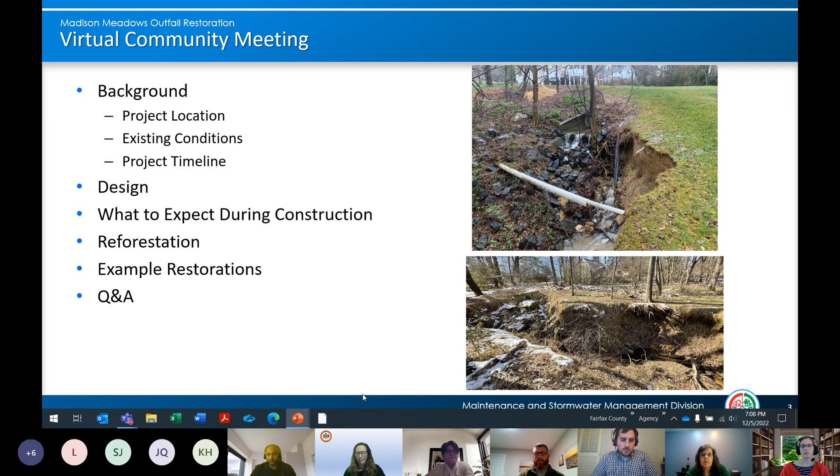The project starts at a gully just upstream of what we're calling Tributary 1, which is coming off of our storm drainage easement off of Madison Meadows Lane. The extents go down to Tributary 2, which is coming off of our proposed access and easement off of Timberlake Court. This channel continues downstream into a pond that has been sedimented in before it crosses underneath Timberline Drive.

The project boundaries on this location map again show that the extents go from upstream of Tributary 1, along the main channel downstream to Tributary 2. There are some bump-outs where we have staging and stockpile areas planned, and the entire project ties out upstream of the playground on the Park Authority property here.

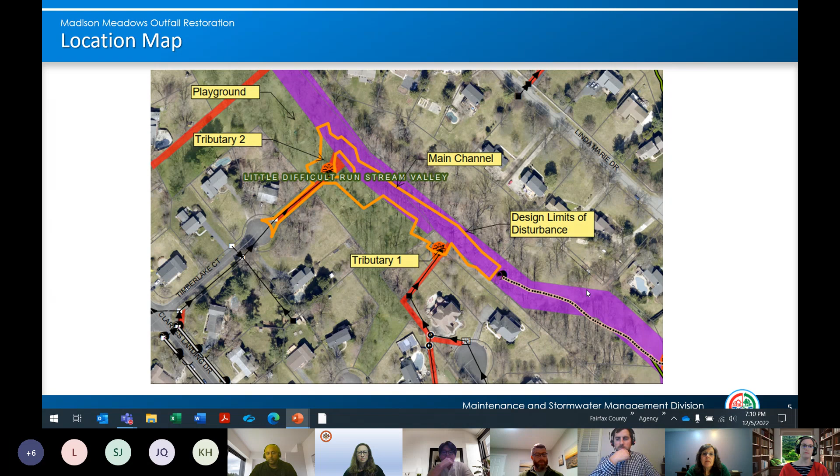Here are two photos. The one on the right represents Tributary 1. This is an eroded outfall. Fairfax County Maintenance and Stormwater Management Division got a service request in January 2021 to come and address this outfall.

You can see this private septic line that crosses in front of our channel that is now exposed. But if you look on the left, upstream, this is the head cut or the gully that has formed upstream of Tributary 1. I like to use the example of Niagara Falls—an important thing to keep in mind is that erosion kind of works its way backwards.

Similar to Niagara Falls, how you have the water running over the falls, eventually over time Niagara Falls has kind of moved backwards—the location of the actual falls has moved backwards along the course of the river. In this case, a gully, a knickpoint, or a head cut are all terms we might use to describe this upstream point of erosion. This will, over time, continue to move upstream within the channel.

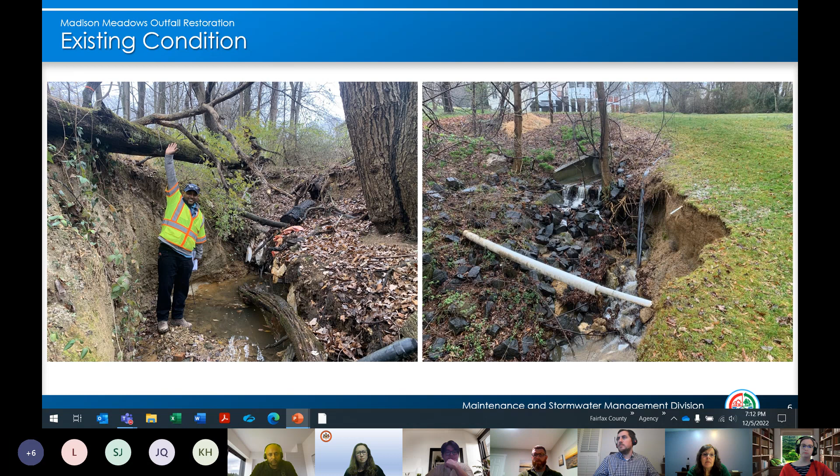Here's another photo. On the left, you can see our staff member again for scale, showing the height of the erosion at that crossing of the septic line. On the right, you can see the tributary coming in from the left and the main channel on the right. The channel on the right goes upstream, the channel on the left goes downstream. You can see where the channel has already deepened and widened, and we have a tree that has leaned and fallen into the stream channel.

We've gotten the question, why don't we just address the tributary without tying into the main channel? We can talk more about this with the design plan—it's not going to be as effective of a design to tie down because you have 5 feet, 6 feet of elevation difference without raising the entire main channel as well.

Before we move on to talk about the existing condition of the main channel, the septic line that's crossing - you can also notice there are 2 size pipes. In theory, the larger pipe is supposed to be a protective outer casing for the inner pipe, but the erosion has extended far beyond that, putting that private infrastructure at risk.

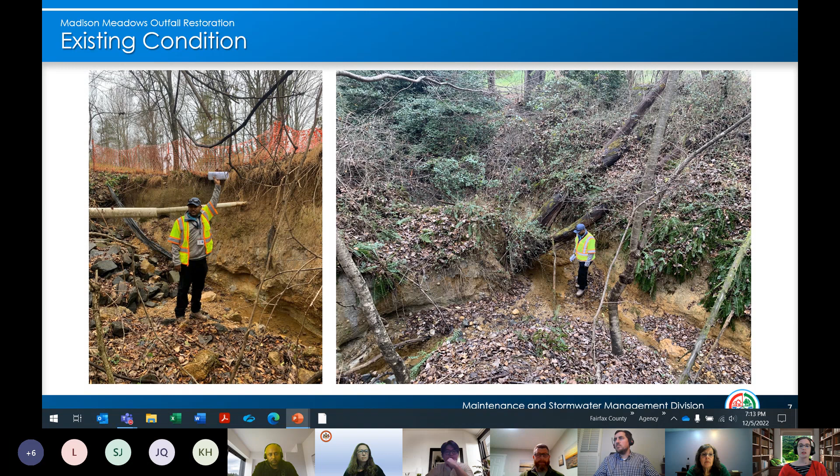Here's 2 photos taken from the main channel. The erosion in the main channel isn't necessarily visible from the top of the bank, or in the left picture where Jack is standing. But if you get down into the channel, you can see evidence that it has downcut and is starting to widen, eroding the soil underneath the bank.

And John, do you want to add some more about channel morphology? Yeah, the typical evolution of a stream is it erodes down until it hits a hard surface like bedrock or some big substrate. Once it hits that point, it starts over-widening. I think most of this channel has hit bedrock, and you can see on the picture on the left it's starting to widen, eroding the banks out on the sides and causing the trees on the banks to become undercut and eventually fall in. Is that what you were looking for, Rachel?

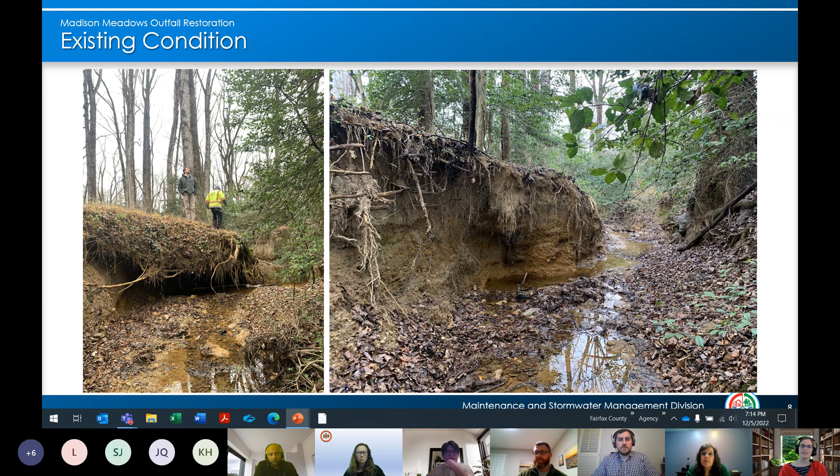Yes, thanks. So just downstream of that, here's another example where the erosion, that widening, is causing the soil underneath and through the root balls of these trees to erode up. There's another knickpoint going through these root systems. This is now on the Park Authority property, and it creates a tripping hazard and a safety hazard. These conditions are fairly typical of the channel throughout.

As we walk down a little farther - Jack, John and I were all there for scoping this project when we got the service request in - it opens up to a fairly wide area with no large diameter trees or understory trees that wouldn't be shown in the design plans. As we were walking down trying to scope this project and figure out the best course of action, this immediately looked like a great place for a staging and stockpile area with limited impacts. On the left is a photo of a separate staging and stockpile area closer to tributary 1.

As you walk down farther, just past a clump of trees from that staging stockpile area, this is where you have tributary 2, and you can see it's eroded almost as deep as Ashenafi is tall. The end section of this is our closed storm drainage system. It outfalls here, and that end structure has settled and is starting to fail. Keeping in mind that erosion moves backwards over time, if we did not restore this, that erosion would work backwards to worsen the condition of that end wall and the pipe system, making it more work and more cost to repair.

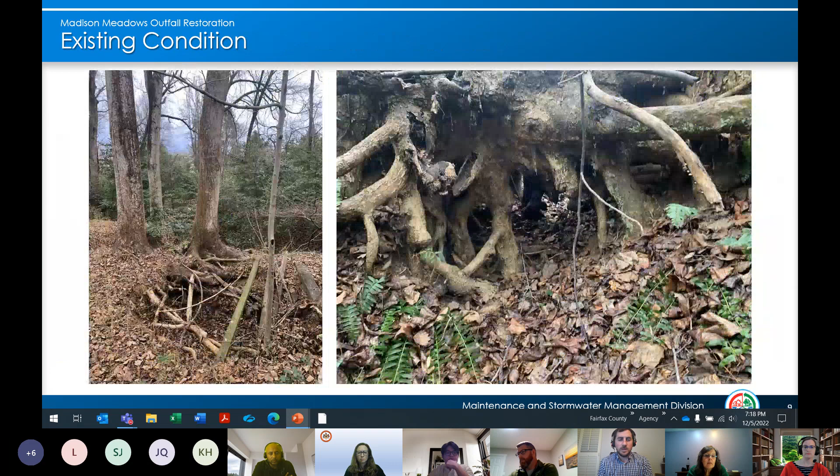One option being: do we just fix the tribs? It did not seem feasible to just fix the two tributaries, given that we wouldn't have anything to tie to with how deeply incised the main channel between the two tribs was. That's really what drove our scoping discussion during that meeting, and how we built the basis for the scope of work to complete the design.

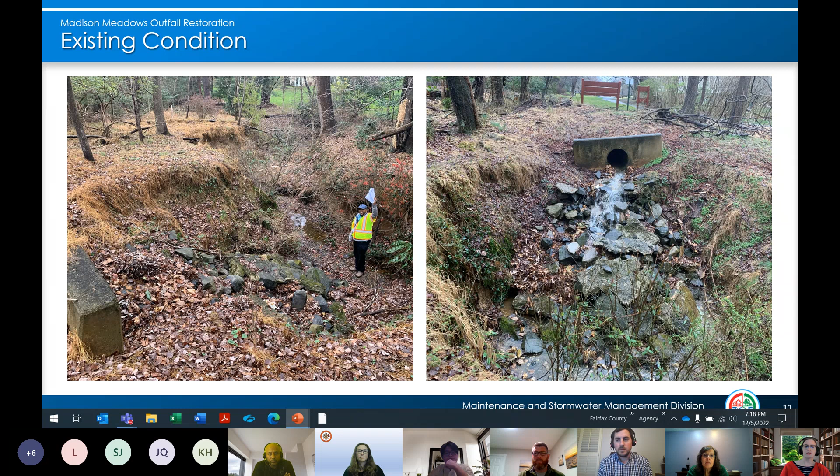So we've also got questions about our proposed access. Our planned access, again like Jack was saying, we walked the site and saw this open area for good access, with few impacts for staging and stockpile.

There's also an access and storm drainage easement through this entrance for the park property. We've talked with Park Authority about maintaining this path and keeping it open during construction. For safety, we'll put up a 6-foot fence to separate pedestrian traffic from construction traffic. Overall, it's grassy, so there would be no tree impacts.

The alternative where we came in off of Tributary 1 — we have a storm drainage easement here, but you can see it's developed. There'd be larger tree impacts and more impacts to private property, as well as the private septic system.

Right off the bat, even just with scoping, it was readily apparent that access off of Timberlake Court would be preferred, and we'd be down in that area repairing the end wall and Tributary 2 anyway, so it only made sense to have the same access through the entire project.

I would add that when we talk about access, we look for areas where we have existing easements and land rights, and what's going to be least invasive to private property.

In this case, we had Trib 2, which had failing infrastructure and significant erosion, located in a storm drainage easement on Park Authority property. From a feasibility standpoint, this was the most feasible option for access, and it got us to the stockpile area the least intrusive way possible, as well as putting us in the area where we're going to be making repairs to Trib 2.

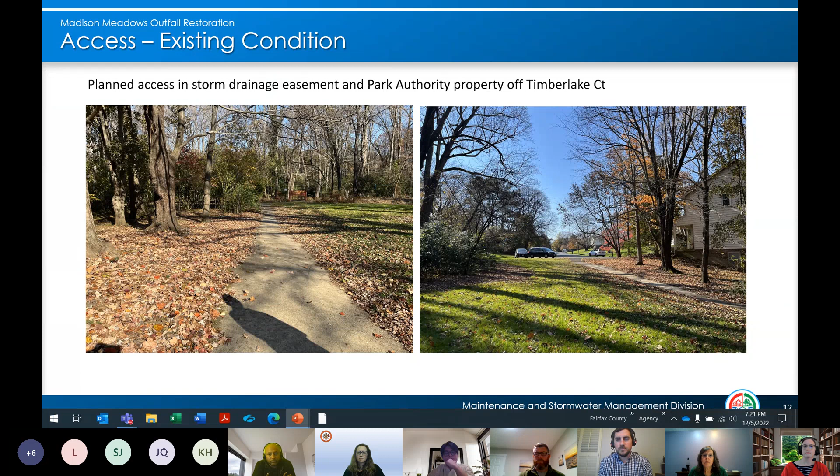So just a review of the timeline: the service request came in January 2021. That spring, Jack and I went out to scope it with Wetland Studies. We negotiated the scope and signed a task order for them to start design in late summer 2021. Throughout the fall and winter, survey was completed and the design commenced.

We went back and forth with floodplain modeling to make sure any impacts from construction — the extent of the floodplain, since we were raising and widening it — stayed within our county's floodplain easement. Once that checked out, the design was submitted to us.

We received it in the spring of 2022. As our workload allowed, we reviewed that design, and in September of this year, Ashinafi and I went out in early September to review the design in the field.

At that time, we made contact with two homeowners adjacent to the construction access and initiated conversations to get emails and start a community meeting. Through September, we also sent letters to homeowners whose properties were either affected, within the limits of disturbance, or immediately adjacent to construction. That included reaching out to the Clarkes Landing HOA.

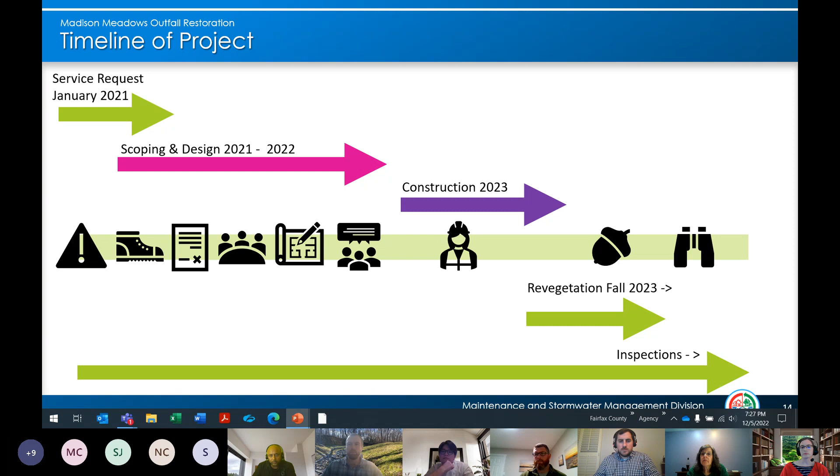So I'm going to hand it over to Irini and John to talk about the design. Here are some photos that represent what you might see on the design plans, on the engineering plans. The channel bottom is going to be reinforced bed material, a mix of gravel, boulders, cobble, and topsoil. And then there are other structures, which might include boulder pools and step pools, made out of imbricated or stackable boulders. We'll let Irini and John talk to that.

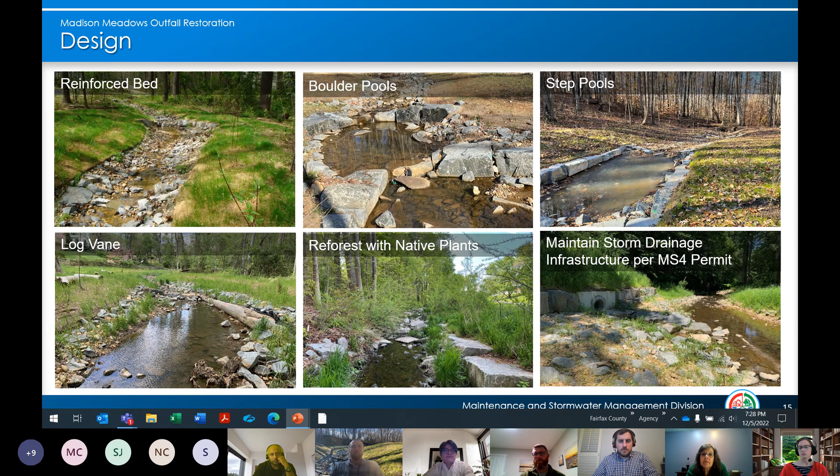We have several structures that incorporate logs, so a lot of the trees that may come down, we try to reincorporate into the designs, and reforest with native plants. We also have end walls that we're going to be replacing - one end wall. All right, so Irini.

Thank you, Rachel. Yes, this is the grading plan from the plan set. In the middle of this map, you can see the main channel, right now flowing left to right as it is oriented on the map. Tributaries 1 and 2 are flowing top to bottom, tributary 1 on the left, 2 on the right. The main channel length is about 650 feet, tributary 1 is about 50 feet, and tributary 2 is about 100 feet. As Rachel said earlier, we are starting the restoration of the main channel all the way to the left.

That is where the head cut you saw in the photo is, and that is where we're putting the structure - a step pool, like you saw in the previous slide, made out of imbricated rock. We are moving downstream and raising the channel; in some areas, raising it about 6 feet. This allows water to access the floodplain more frequently, so the velocities of the water will go down, and the erosive forces won't be as strong, so the banks can remain in place.

Hey Irini, I'm sorry to interrupt, but one of the residents is having trouble getting a frame of reference. Can you just point out a couple streets or a different landmark? Oh yes, of course. Thank you. Oh yeah, sorry about that, I didn't see the chat.

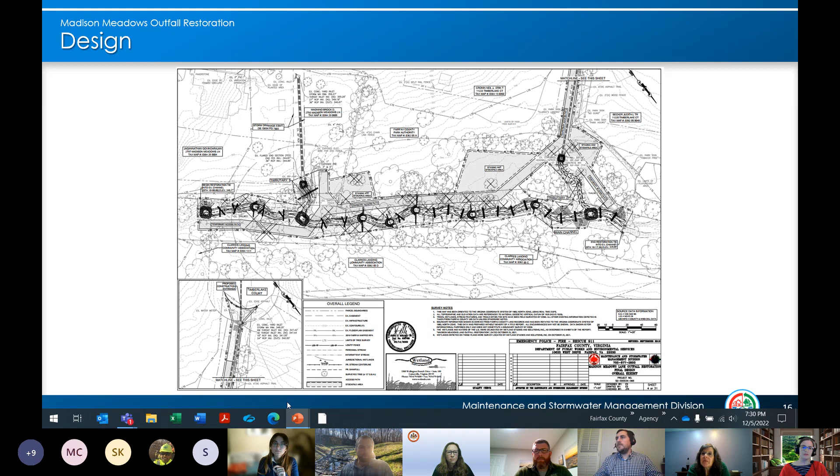At the bottom of the screen would be Linda Marie running parallel to the channel. Here is the home at the end of Madison Meadows Lane. And then over here is Timberlake Court coming into the park, just to get your orientation.

Thank you, I hope this is clear now. So as I was saying, this...

Moving downstream, we can see there are multiple structures: step pools and boulder pools, as well as log structures. Those are the Ys that you see and the straight lines that you see on the bottom half of the restoration.

In addition to that, we've got some step pools at the upstream end of the restoration for both tributaries coming right out of the pipe. And we are also proposing replacing the head wall, as Rachel said, on tributary 2.

The shaded path that you see is the temporary access, and the dotted hatch are the proposed staging and stockpile areas.

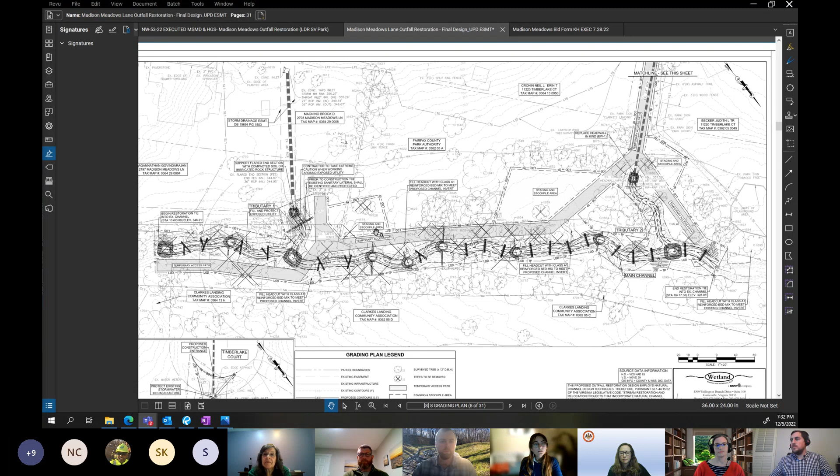This is the main channel. As you can see, we are raising the main channel quite a bit upstream. It has been severely eroded downwards in the past, so we are raising this back up.

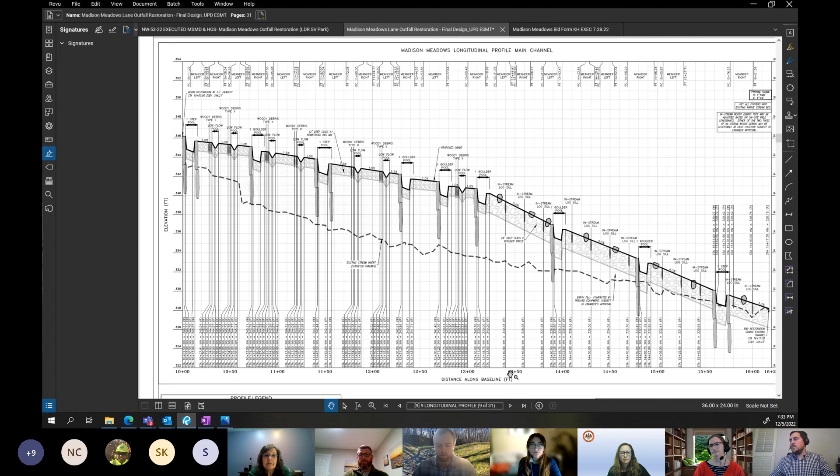If we move to the next page, there should be the profiles for the 2 tributaries. Tributary 1 is the one that has the exposed sanitary line that you can see over there, and you can see how severely eroded the channel is right now. We're proposing about a foot of cover with the design.

On the right is... there was one comment about only doing the 2 tribs and not doing the main channel in between. To get this trib to a stable condition without doing the main channel, we would never be able to get cover over the sewer lateral or the septic line, because we wouldn't be tying to a stable condition.

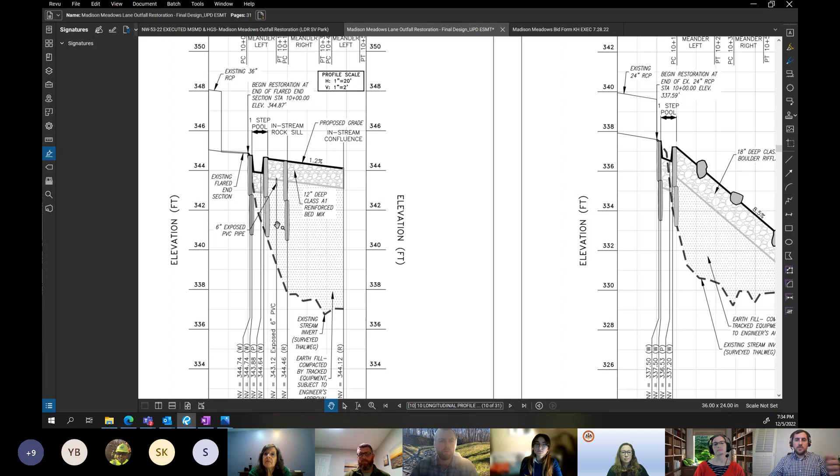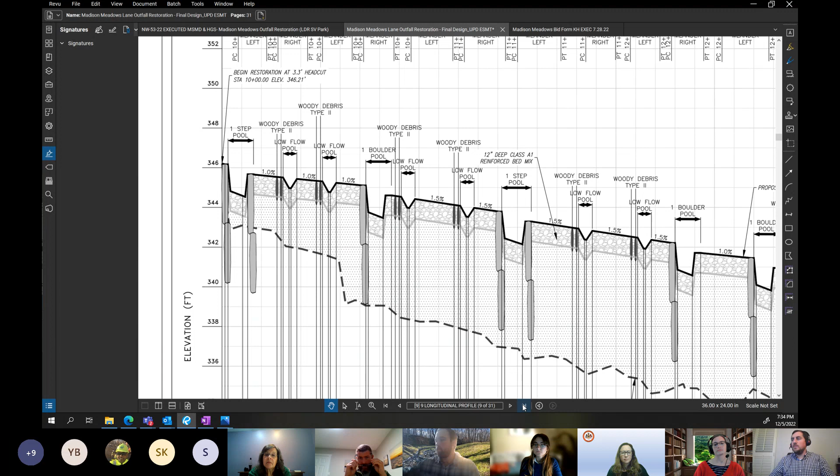So by raising the main channel in this area 5 to 6 feet, that's given us something to tie this tributary in at a stable condition at a higher elevation and gets the cover over that sewer line that we need.

And on the right is the proposed profile for tributary 2. I want to point out that the hatch you're seeing at the top that looks like little rocks is the reinforced bed that Rachael pointed out before in the photos. So you can see how we have a thick layer of that in the design.

Irene, can you just discuss a little bit the channel size? I think it's 10 foot wide. Yeah, the main channel will be 10 foot wide by 1 foot deep, and the tributaries are smaller, they are 6 foot wide by 0.6 feet deep.

And I think a lot of the existing conditions now are 10 to 12, maybe 10 to 14 feet wide, and 7 to 8 feet deep. So it's going to be a huge difference as far as safety and stuff goes too.

Looked like there was a question about coverage over the sewer line and whether we would expect it to erode again. No, I think we have confidence in the design approach, and by using this reinforced bed mix, expectations and experience suggest we don't expect any erosion with the bed mix. That's why the type of bed mix is sized appropriately to withstand the shear stresses you'd expect in the runoff leaving the end of that pipe, the storm pipe.

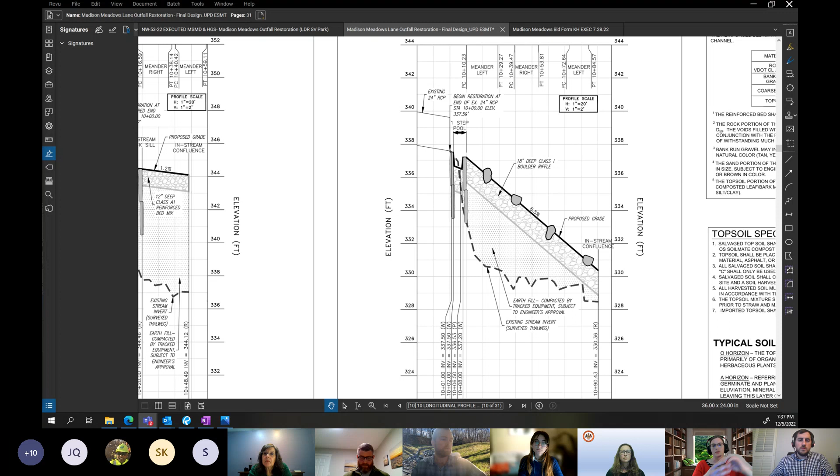One other protective aspect of the design is the length of the restoration of the main channel. Post-construction, there'll be several pools and structures dissipating energy throughout the channel. If erosion moves backwards, it likely started closer to the downstream pond and worked its way up. We have photos showing that downstream pond by Timberlake, where the outfall structure was already sedimented in by 2003, telling us that channel had been eroding and moving backwards. We wouldn't expect that to happen again since we now have structures along that channel and ahead of the tributary and septic line. So restoring the main channel gives more protection to that private infrastructure and the tributaries as well.

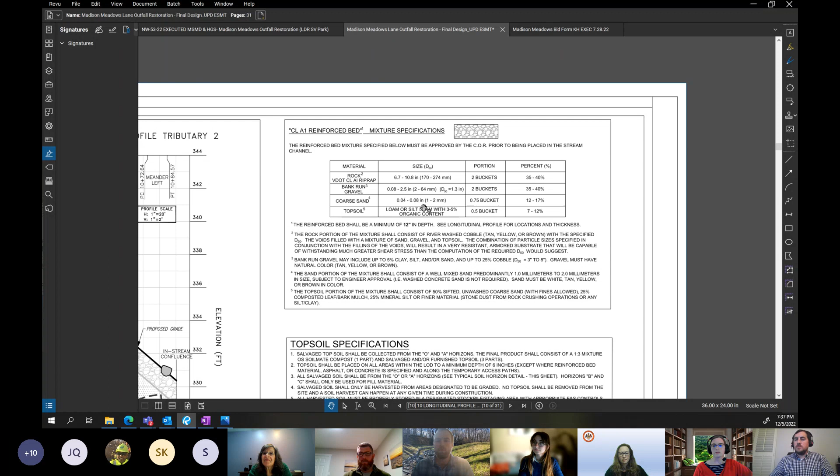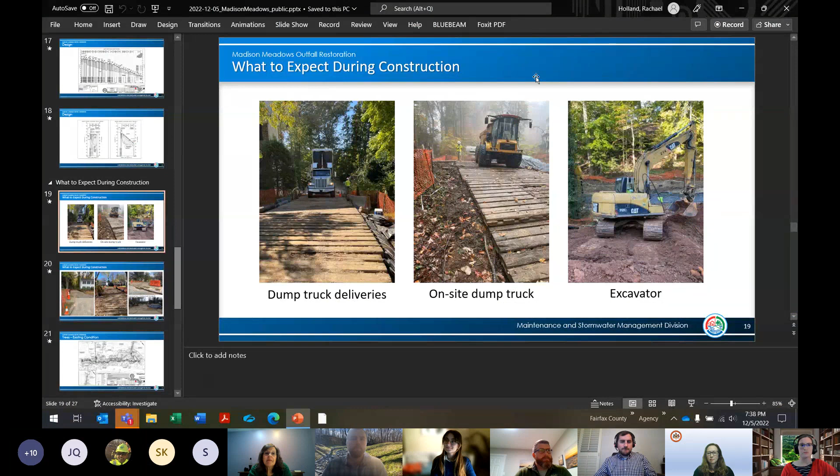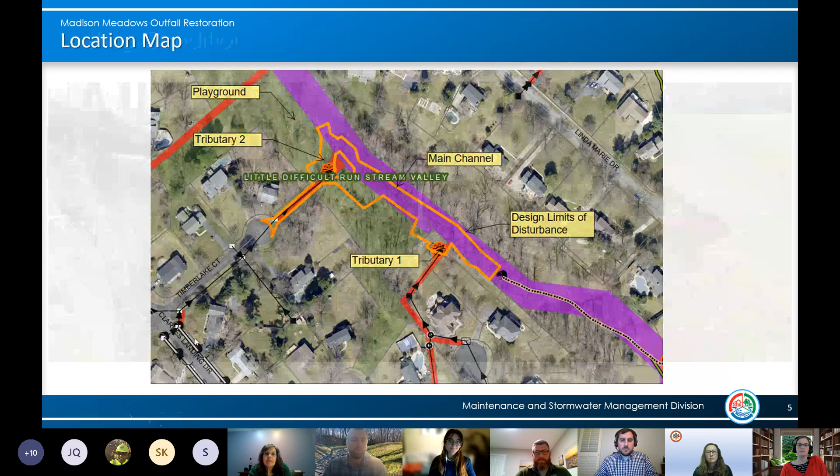Next up is what to expect during construction. Let me share my screen again and start from the beginning. Kyle, you want to talk a little bit about what equipment you have on site?

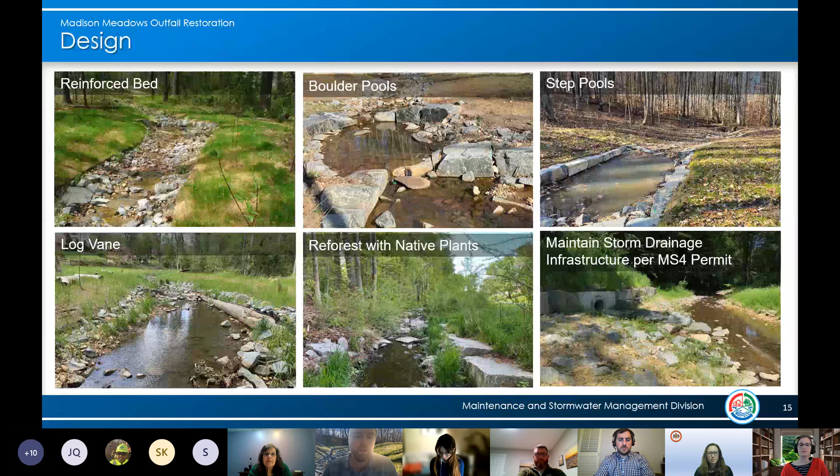Sure. Our normal equipment package for all of our crews includes on-road dump trucks bringing materials, whether rock, mulch, or fill to bring the channel up. We also have off-road dump trucks to transport material around the job site, a few different size excavators to help place material, and a skid steer to move deck mats and for general movement throughout the site. These are the main things you'll see on site while we're there.

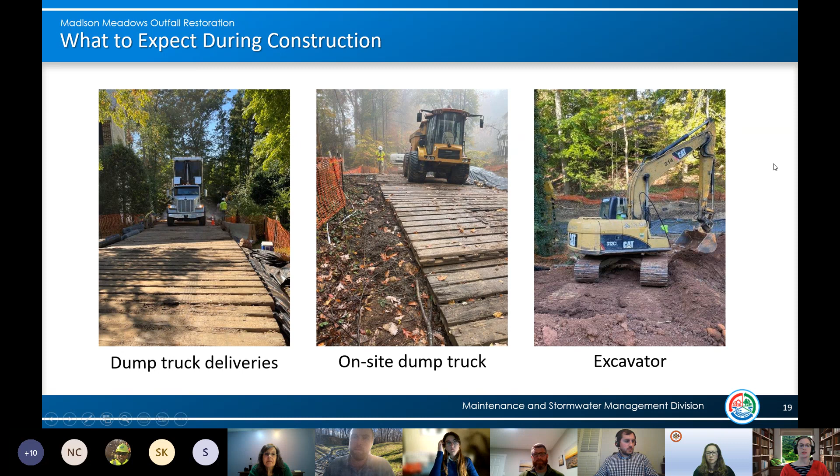Our construction access will consist of deck matting, with limits fencing around the work areas throughout construction. Even our staging and stockpile areas where there are tree roots to protect will have deck mats down. Where we cross over asphalt or curb for driveways, we take pre-construction photos to document the condition, and we have contracts to repair any damage post-construction.

We can address the trees more with the questions. On the design plans, we have all the trees slated to be removed highlighted with X's. Some of these you've seen before, and here are additional photos showing them being undercut and leaning - some of the trees being removed. Others are in poor health. These are three of the trees slated to be removed for construction access upstream of the stockpile area.

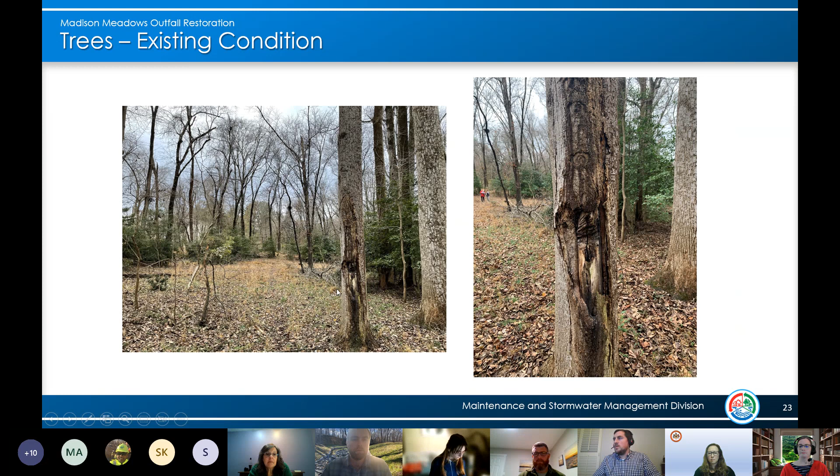The trees being proposed for removal aren't just for the access path. They're really being removed because of the close proximity to the channel and the grading that will take place, impacting the critical root structure of existing trees right at the top of bank of the existing channel. So these trees along the staging and stockpile area are both in our proposed access, but also need removal because raising the channel, grading, and constructing these structures would get into their critical root zones.

But there will remain mature tree canopy on either side of the construction limits, both toward Timberlane Court and along Linda Marie. We also have tree save areas, and we've walked the site and identified a few more trees we can try to save. We can talk about that later with Q&A.

After construction, we have a comprehensive revegetation plan. Jack, do you want to talk about the planting, or John? Yeah, I'll defer to John - I can't remember exactly what species.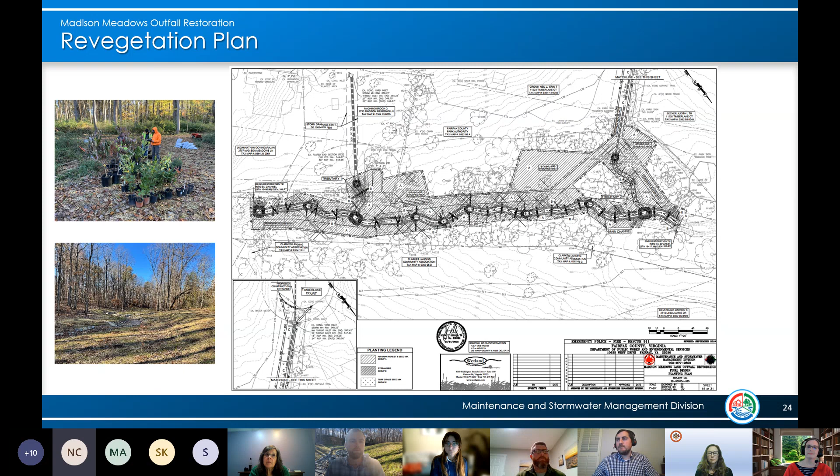That is correct, yep. So my question is, if you look—and it's particularly obvious now that the leaves have dropped on the larger trees—there's a lot of native hollies, dogwoods, and redbuds in there. What would be your estimate of how many of those understory trees there are for each of the 40 large trees being removed?

The reason I ask is I'm trying to get at a total number, because I suspect there's probably 1 or 2 understory trees for every large one. Is now a good time to answer this, or should I wait? Yeah, it's fine, it doesn't matter to me.

Okay, can you go back to the photo of the proposed staging area? That'd be a good reference.

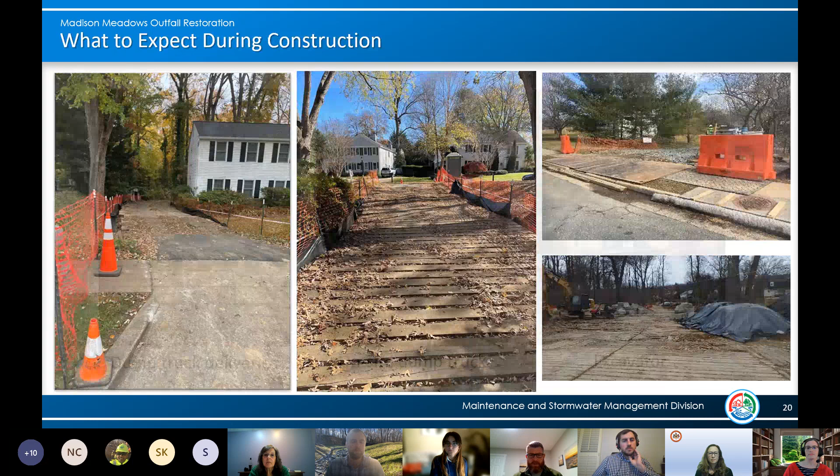So we just walked it the other day to take a harder look at the trees, as part of the process I explained in the first meeting. We do the initial design, put X's on the trees we believe we're going to impact to the point that they need to be removed, and then we go back out there in the field with the contractor and the whole team to assess things.

Do we need that access? Can we use the channel for access? So we did that walk just the other day, last week, to get a better idea of what we could save.

At that point I knew this was going to be a question. We took a look around, and to be honest, there weren't that many small trees. There were some hollies that need to go along the stream channel or access route, but the picture on the right shows the staging area.

And actually those hollies on the right of that photo are Japanese holly, which are invasive. But I think they're outside of our limits anyway. We were going to pull in the limits, so it still left that screen specifically for you and your neighbors there. But there really wasn't that many.

It wasn't that dense. Jack and I looked at each other and said, why is there nothing growing in this area? I don't know if there was some building there before, but it was kind of weird—there was nothing but invasive stilt grass. I hate to say stilt grass, but the whole thing was just stilt grass there.

So I would say in general, the condition of the forested area through there is going to be in a lot better shape after we do our work and replant, not just from the water standpoint, but the diversity within the forest is going to be really good.

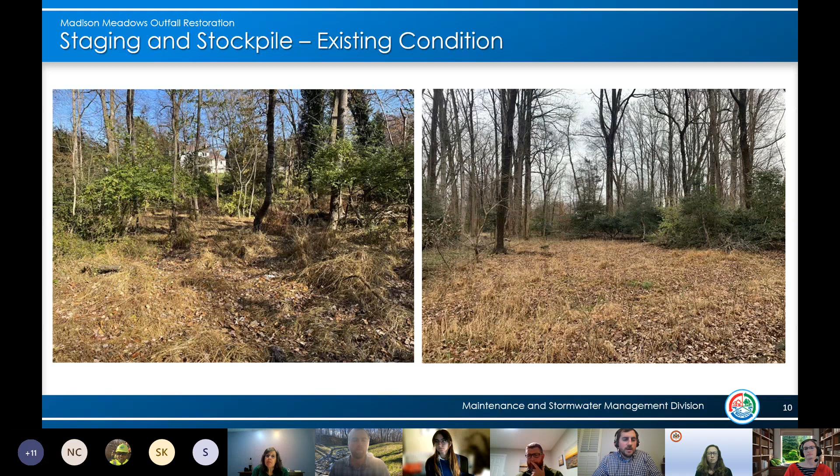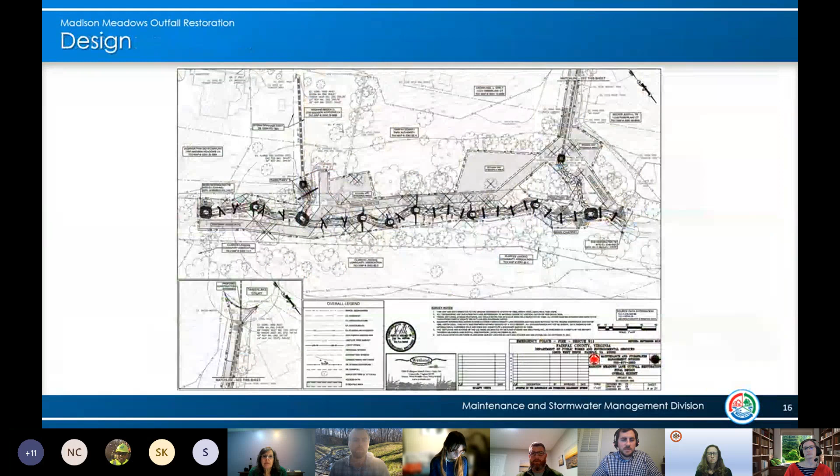Yeah, it's really hard to get a handle on what that number is because 40 sounds like a big number, and anybody that hears that reacts to it. But the good news is, on our walk the other day, we took that 40 number and believe we'll be able, by making some red line markups to our plan, to get that number down closer to 28, which again is going to be predominantly about 95% tulip trees, the most dominant species of trees throughout this stretch of forested area.

There was a question in the chat about wanting to know that all trees being removed are absolutely necessary. I think the goal of this project is to be an ecological, environmentally friendly project, with the understanding that we're going to have temporary impacts during construction. Our goal is not to decimate the forest and take out every single tree within the limits of disturbance.

When we get out here and start doing these projects and looking at each tree individually, we do our best to try to save as many trees as possible. I think we'll be able to save about a dozen of those larger tree species that we had originally called to be removed. The number of the smaller stuff was a lot of invasive that would be removed, which we see as a benefit for the area. There was also a good amount of smaller cherries within the limits of the project that we'd be removing. But with the diversity of the planting palette we're going back in with, I think we're going to greatly improve the overall forested area throughout this channel corridor.

Sometimes it's really hard, and I've done a lot of these presentations over the years, to show somebody on a screen the current condition of a tree being undercut and things like that on the stream bank.

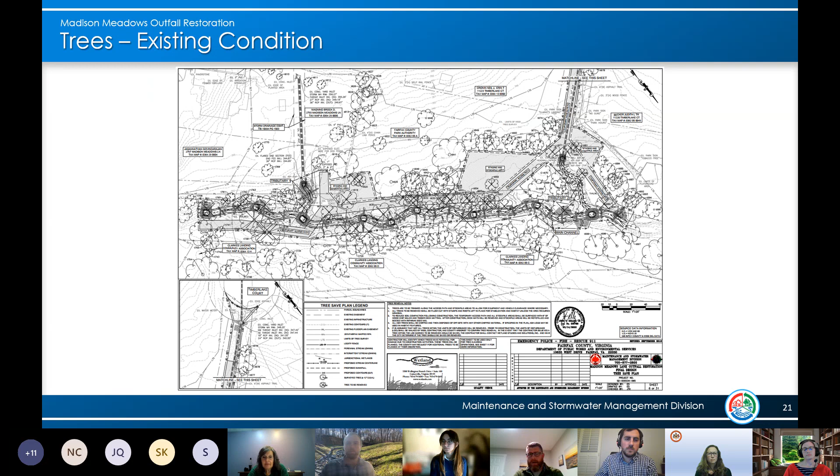I know Rachel had mentioned it before, but we will have an official pre-con meeting, and I don't want to speak out of line, Rachel, so you can stop me. We had invited the community, or offered to the community, to take a walk with us with the trees to have that conversation before construction starts. Right now we're looking at the first Wednesday in January, and we'll coordinate with the supervisor's office so they can pass that along to see who would be interested in walking the channel and specifically discussing the tree concerns.

That's kind of my wheelhouse, getting you in the field to look at the trees, and I can dispute all day long why a tree should or shouldn't go, because I'm a certified arborist. I certainly don't want to remove all the trees. But you also have to take into account we have a playground there, so if we're going to impact a tree that could potentially decline and fall down in 5 years, you just can't take that risk.

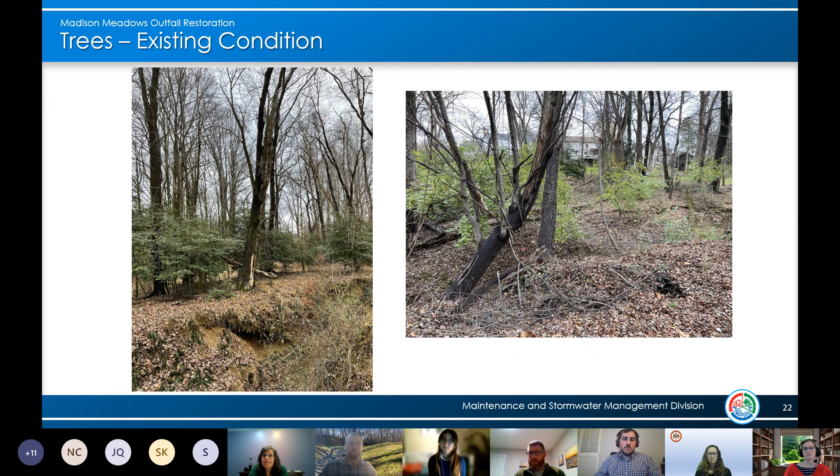I think I'm done. Thanks, John.

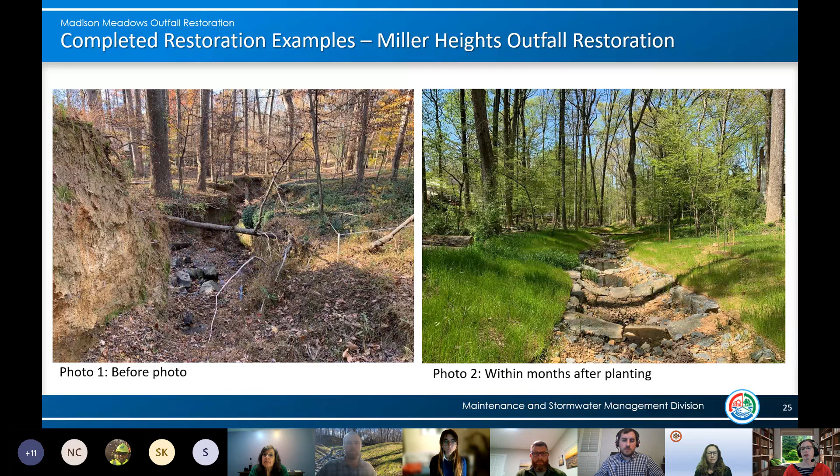Just again, for setting expectations, here's an example of a restoration project they did with the same group, with Wetland Studies as the designer and Resource Environmental Solutions as the contractor. On the left is the before condition, on the right is the post-construction photo immediately after planting. Over time, even this will grow in, and it will not be as open once the trees grow, and we planted live stakes as well. But from a safety perspective, we expect it to be much improved, and to the extent that we can on our projects, we try to maintain that canopy coverage and plant to close in that canopy coverage after we're gone.

Any questions? I think that there was at least 2 questions in the chat that haven't been addressed yet. I'll take the first one, then I might let Ellie jump in on the second one.

The first one was about cost. The construction estimate that we've agreed to and gone into contract with Res on is $768,000, which when you look at industry standard for this type of work, if you're in the $800 to $1,000 a linear foot range, you're probably doing pretty good in terms of cost per linear foot. So based on the length of project and the construction costs we're expecting, we're right in the ballpark of industry standard for that.

Then the second question, which I'll let Ellie grab, is about the upstream development on Madison Meadows and the farm pond that used to be there that's not there anymore. So thanks.